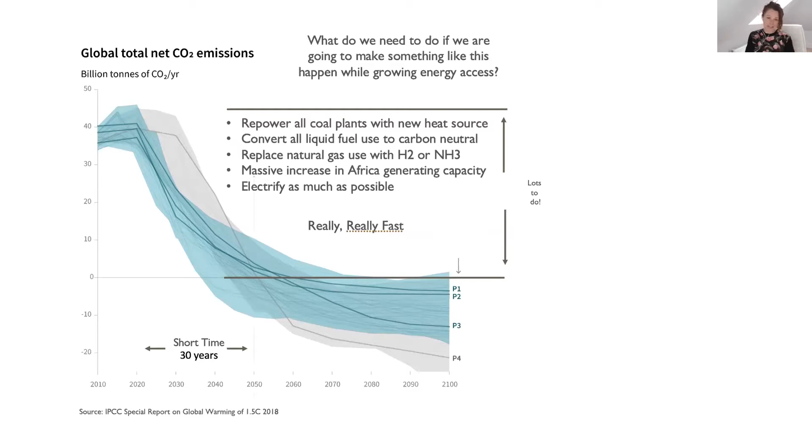We need to convert all liquid fuel use to carbon neutral fuels, and that's mainly what I'll be talking about today - replacing natural gas as well as oil for transport and other uses with hydrogen, or more likely hydrogen-enabled synthetic fuels, whilst enabling a massive increase in generating capacity, particularly in Africa. It's very troubling to me that BP, for example, anticipates that the number of people who lack access to electricity at all will increase from today's figure of 840 million people to 3 billion people by 2040. So really, we cannot, from an ethical perspective, and also from a realism perspective, avoid building in massive increases in energy use, as well as building out our climate mitigation strategies. What we need actually is climate prosperity. And then, yes, we need to electrify as much as possible, really, really fast.

Now I'm going to give you an analogy we like to use when thinking about the kinds of solutions we need to develop in order to achieve the scale of transition within those very rapid timescales. I don't know how many of you are familiar with the Impossible Burger. It's a plant-based substitute for meat, and it's honestly incredible how widely available that is now. You can buy this plant-based substitute in almost every Burger King in the United States, and people are switching to that option - not necessarily because they've decided to become vegetarian, but basically these plant-based substitutes look like a burger, taste like a burger, cost the same as a burger, and you can buy them through the existing supply chain. That has enabled a very rapid switch that we think we need for all of our climate solutions - they need to be effectively drop-in substitutes in terms of cost and performance, just the same as the fossil fuels we use today. We shouldn't really be expecting people to pay more or change their behavior in order to enable that switch.

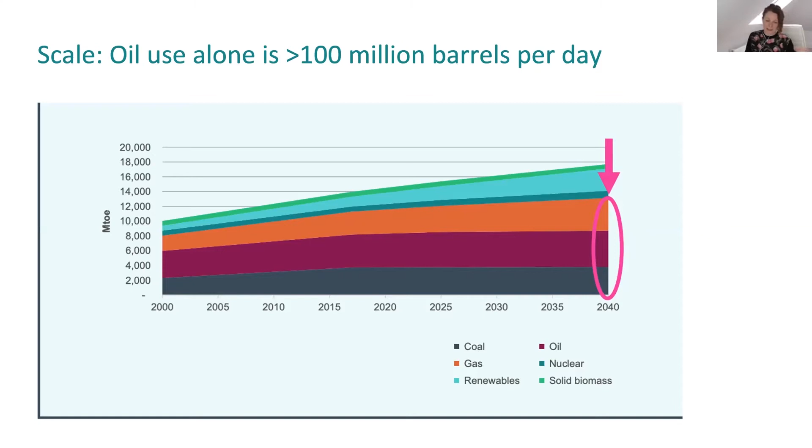So let's look now at the fuels decarbonisation challenge. This really is about driving that deeper decarbonisation with nuclear energy. Don't forget that these projections I showed you a moment ago of fossil fuel use by 2050, or up to 2040, assume a massive expansion of renewables and very effective energy efficiency. But despite that, we're still anticipating using 100 million barrels of oil per day. So the scale here is enormous. The reason we see those projections of oil almost untouched through to 2040 is because, frankly, there just aren't cost competitive, credible pathways to decarbonize those hard to abate sectors and provide drop-in substitutes equivalent in cost and performance to the fossil fuels we use today.

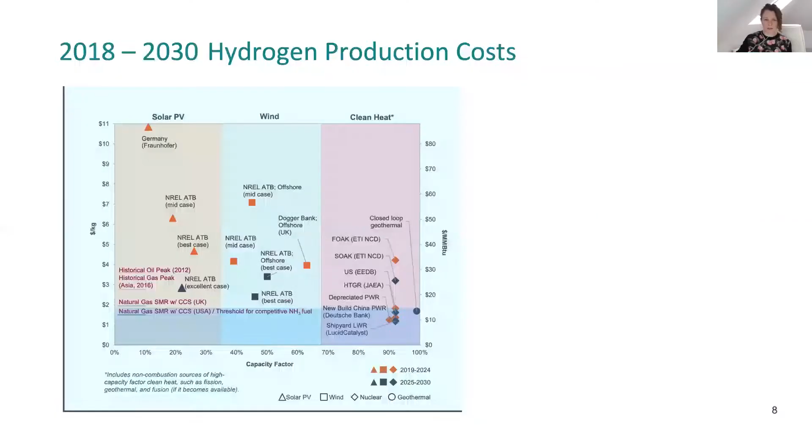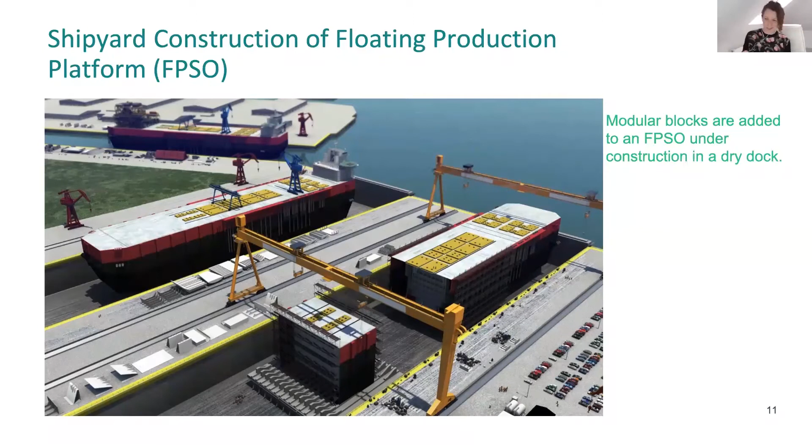So really two innovations here. First, the innovation of moving your plant construction to a very high productivity manufacturing environment that incorporates parallel construction, as well as very high quality automated installation and supervision, while also moving to a very innovative deployment model. So you have a very innovative delivery model and a very innovative deployment model.

As well as producing hydrogen and ammonia, which can be used directly in existing decentralized generating infrastructure in the developing country, in diesel engines, in diesel generators, in combined cycle gas turbines.

One of the features of this multi-product platform that I particularly like is that it also uses the waste heat from the high temperature reactors to desalinate a large enough amount of water to supply the entire city region of Accra per day.

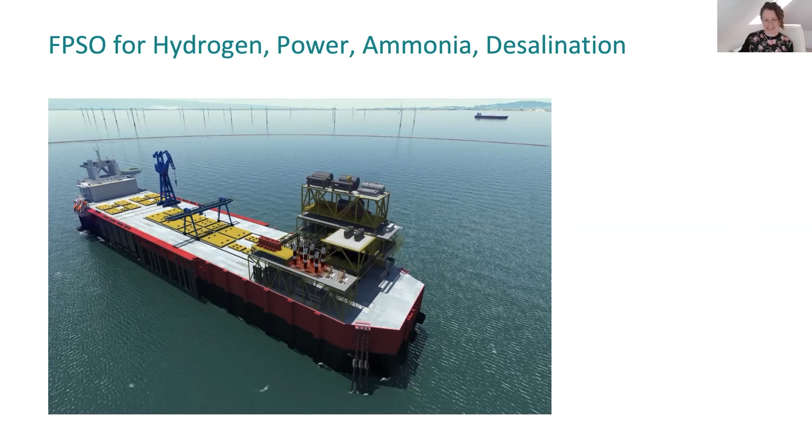So really, an incredible multi-product platform that also presents a very different investor proposition for major infrastructure development in developing world countries. Because if your customer for some reason decides not to pay, then you can actually remove your facility. Hopefully that's not going to be the case, but it does really change the investor proposition.

We have a new report coming out in the beginning of December, which describes very detailed techno-economic analysis for these scenarios that I'm showing you today. So you'll be able to dig in, if you're interested, into a lot more detail.

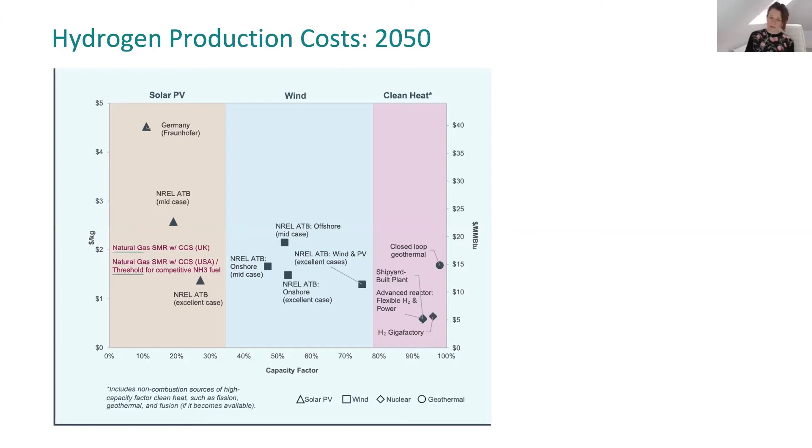But in addition, the renewables data points you're seeing here that may get down to these low costs by 2050 will be very limited to locations where the resources are available, which may well be quite remote - Western Australia, Northern Africa, the Middle East. But then you also have to take into account transportation costs, which can make quite a major impact on the end cost of the fuel.

Now, if you were to apply what our report, The Missing Link to a Livable Climate, shows, that if you were to apply these very innovative technology solutions to the production of clean synthetic fuels, it would be achievable to substitute fossil fuels in the hard to decarbonize sectors between the 2020 to 2050 timeline.

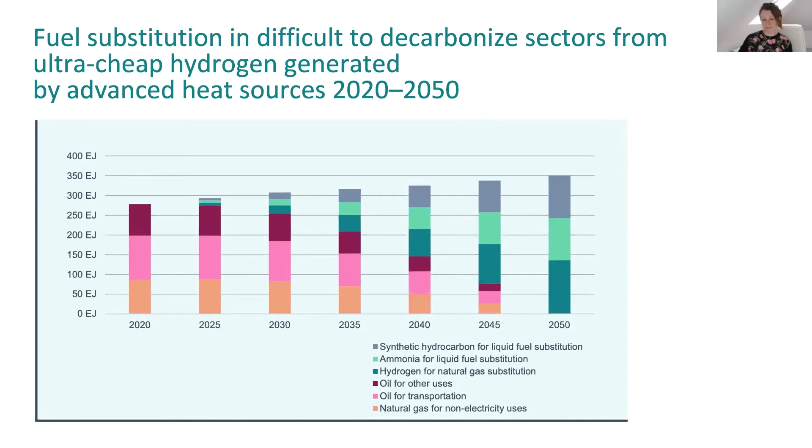And here's the chart that shows that transition taking place. We've also done some analysis around what that would cost to achieve that full transition for the 100 million barrels of oil per day.

We started by looking at what the oil and gas sector is intending to spend anyway on sustaining that flow of oil, which amounts to around $24 trillion for exploration and development within those 3 decades to sustain the existing flow of oil into the global economy. With the application of our innovative facilities, we'd estimate it to cost considerably less, around $18 trillion, to achieve the equivalent oil and gas flow.

So as my 9-year-old put it very well, he said, wait, so you mean it's going to be cheaper to save the world than to destroy it? I think that sort of sums it up.

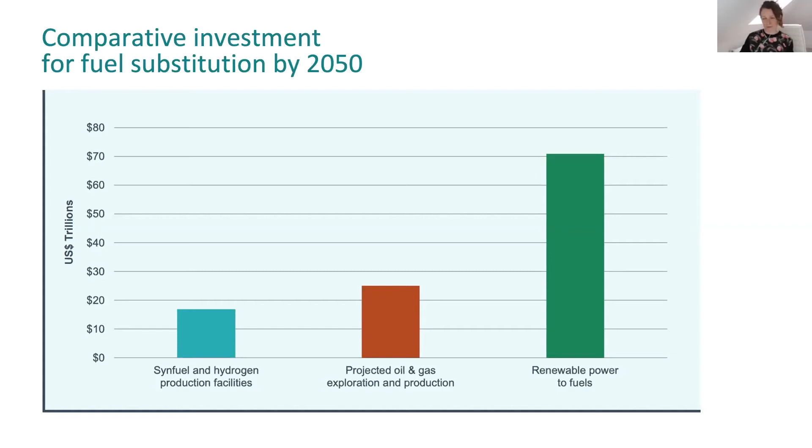By contrast, trying to achieve that same energy flow just with renewables, power to fuels, would cost much more, in the region of around $70 trillion. So very significant difference there. It's worth noting, of course, that we really ought to be focusing on trying to use capital that's already circulating in the global economy, coming back to the impossible burger idea that we cannot assume a lot of additional money is going to be available.

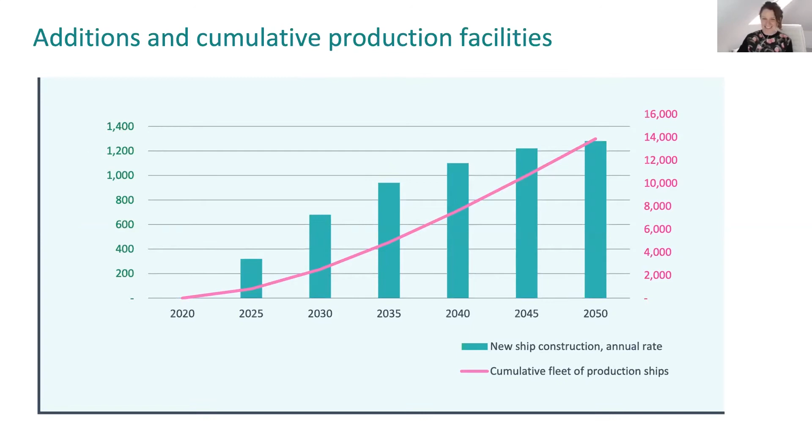So what would it take? What are we talking about here in terms of the number of platforms that would be required to entirely replace the world's oil flows? Well, we're talking about around 15,000 production facilities.

And to build those would take about 60 shipyards. Just to give you an idea, there's about 250 world-class shipyards operating in the world today, and most of those really only at about 50% capacity. Many of those obviously wouldn't already be upgraded to be able to produce these platforms, and would require investment and so on.

But interestingly, many of these platforms we're describing are actually a lot less complicated than those already being built in the oil and gas sectors. So really very achievable. We're doing further studies to get a final resolution on shipyard capability and capacity in the world today, and the kinds of investments that would be required to build it up. But it really is an incredible opportunity, particularly for the UAE, which has already got global world-class shipyards.

This set of slides I won't dwell on too much. Many of you may have previously seen work that we've done around what drives the cost of nuclear new build. And what we found is that actually the majority of nuclear build projects around the world today are very cost competitive and achieving quite impressive schedules.

I think the average cost of nuclear new build in the world, conventional nuclear new build, is about $4,000 a kilowatt. So very, very different from the kinds of really unrepresentative samples we see in Europe and the United States, which creates a very strong impression that nuclear is too expensive and slow to make a contribution towards solving climate change. In fact, these first-of-a-kind, first-in-a-generation projects really aren't representative of the kinds of costs that are achievable once you've established skills and capability within the supply chain.

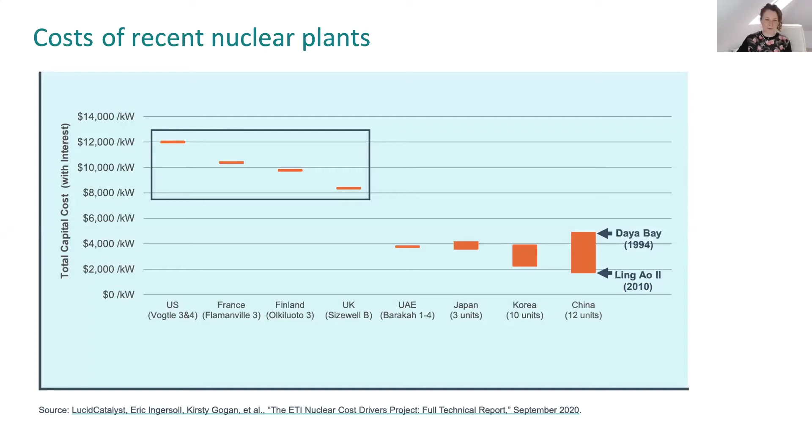And critically, as we saw at Barakah, building multiple units on a single site is a very important way of achieving a lower cost across the project.

So here's what we see in terms of the cost reduction that's very achievable, very explainable, very understandable, from a first-of-a-kind project where you have to invest in your design, in building up skills and capability within the supply chain and the labour force and the project leadership teams, to the kinds of cost reductions achievable so long as you standardise and retain that skill and capability, and sequence through to subsequent projects based on standardised designs.

We can see here the US best experience, the group of plants that achieved a cost really equivalent to the global average today during the course of the United States program of build, around $4,000 a kilowatt. Just to illustrate that it isn't just in Asia that this is achievable, but actually we've done it before in the US and in Europe as well.

And here we have the best experience, $4,000 a kilowatt, and the kinds of cost reductions we'd expect to see by moving from traditional construction to a much more highly efficient, highly productive manufacturing environment, such as a shipyard.

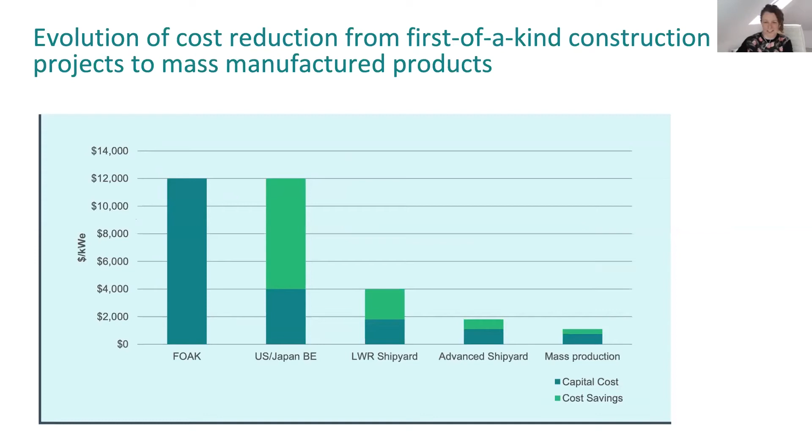And there you can start to see where we get down below $2,000 a kilowatt, down almost to $1,500 a kilowatt. This shows the transition as we establish capability within the shipyards, getting down to around $1,500 a kilowatt into mass production. So this tells the story of cost reduction.

And then there's one final constraint. We've looked at costs, we've looked at investments that are required, we've looked at rates of deployment. Let's take a look at space.

So I've got a couple of maps just to finish on now, which compare the area that would be required if we were to try to replace the UK's current oil consumption with hydrogen generated from either wind, solar, or advanced heat sources. You can see the big pink shape represents a single continuous offshore wind farm. Remember, this is just for hydrogen production—dedicated to hydrogen production.

So I don't know where they're going to put all the offshore wind that's intended to be built for the decarbonisation of the electricity sector, which I think a lot of that space is already bookmarked for. And then you can see the big yellow square there is the space that would be required.

If you were to try to make all of that hydrogen with solar, which I can tell you is going to be politically and publicly infeasible.

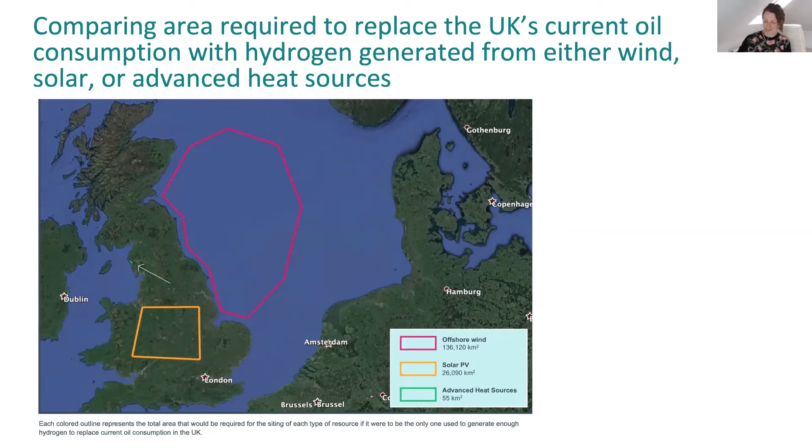And then hopefully you can see the little green dot there, which is the footprint of the entire nuclear technology fleet that would be required to produce all of that hydrogen. Now, this is a thought experiment. Obviously nobody's suggesting we would centrally locate all of the hydrogen production in one location, but I think it's instructive to see the kinds of space requirements we're talking about here.

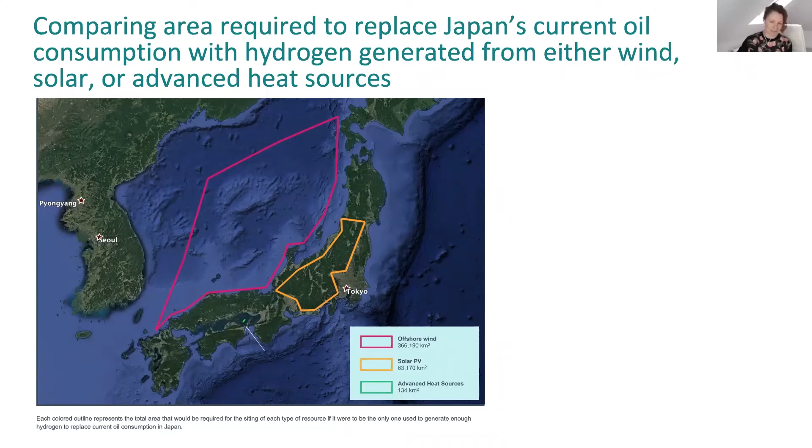Here's another example showing Japan's current oil consumption and the footprint required for hydrogen produced either from wind—again the big pink space—or solar, and we had to put in a little arrow so that the nuclear dot is even visible. Again, a thought experiment. Clearly this coast would not necessarily be developable—it's actually too deep, and there may also be other geopolitical considerations. And likewise, Japan is incredibly mountainous, so it's quite impractical and infeasible to consider developing that kind of space for solar production anyway.

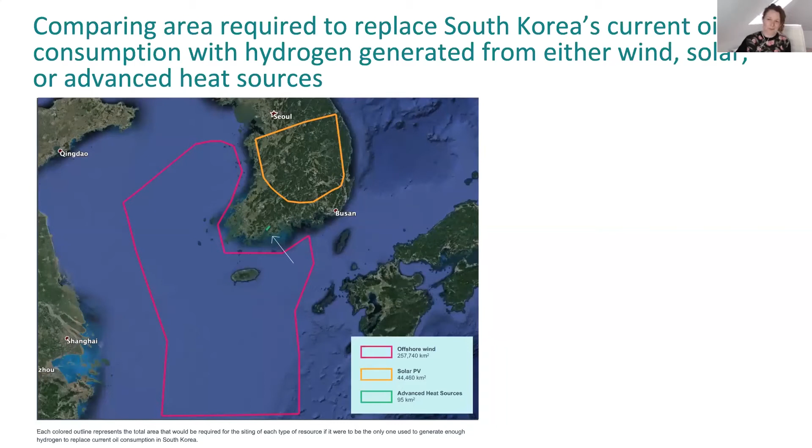So really our goal is to ensure that nuclear technology potential is properly represented, and that we're applying the same creativity and commitment to developing strategies for driving down costs and increasing rates of deployment as we have done successfully in the renewable sectors, but haven't yet applied to nuclear technology. So there's lots of room there for all kinds of improvements.

And given our shared objectives of clean air, tackling climate change, and enabling universal access to clean, reliable, affordable energy, why wouldn't we do that?

So I hope you'll have a chance to review our report at some point, a missing link to a livable climate. And I'm really looking forward to the discussion. So thank you all very much for your kind attention. And I will now hand back the mic to my dear colleagues.